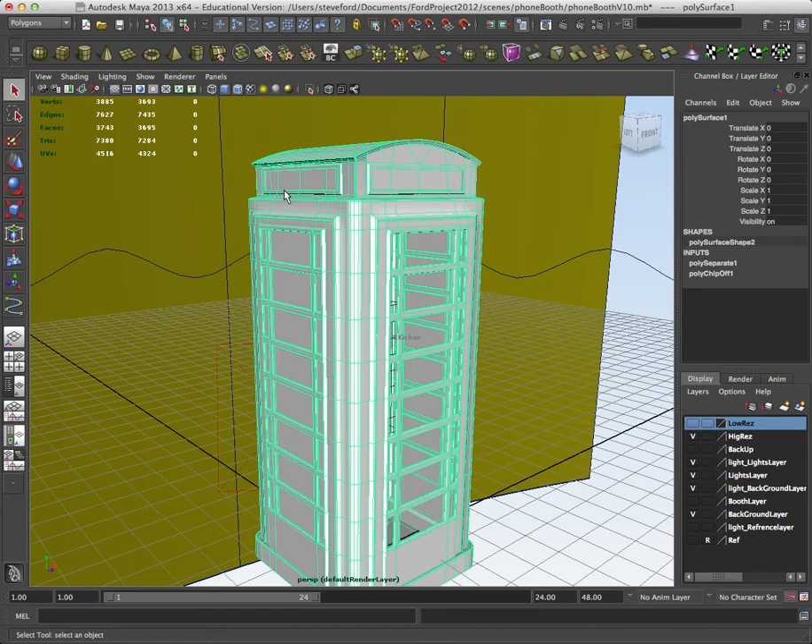Okay, so selection. Selection is very important to being able to model efficiently. There are many tools in Maya to help you with this.

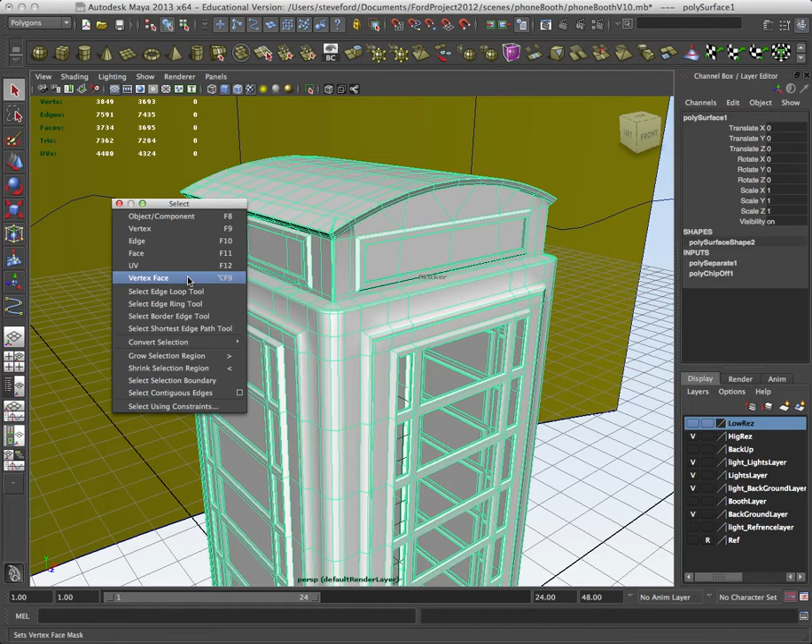I'm going into the poly menus here, and I'm just going to tear off the tab for select here. So you have your select object component, F8. You have select via type: vertex, edge, face, UVs, and face vertex, never have found a use for it. You'll find all those with your right mouse button as you go over things.

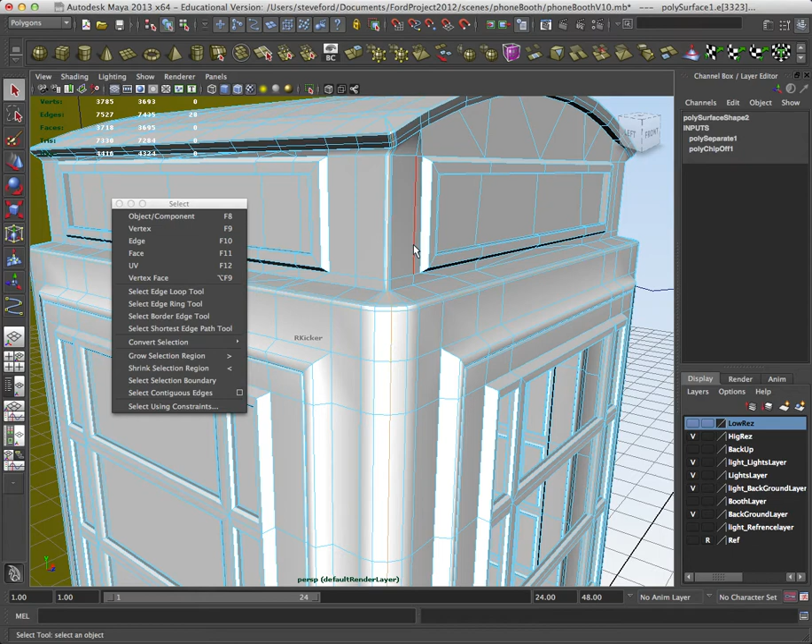One of the handiest things I have found in the latest versions of Maya is if I select via edge and I double click, it goes all the way around the object. That's select contiguous edges, which is this guy. I used to have to make a shelf button for it, but now it's just a double click and it will run pretty much the length until it can't figure out where to go.

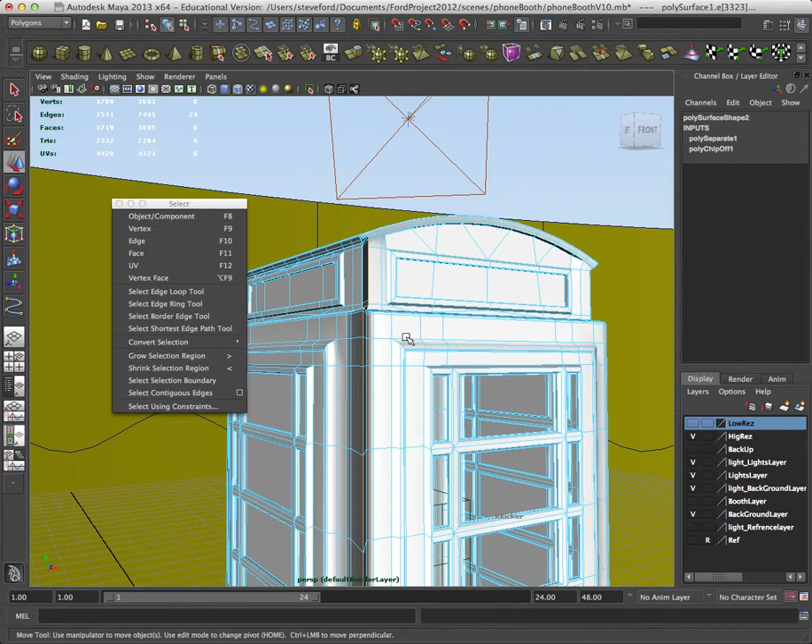Maybe I'd find that useful and I'd just go and deselect these guys because I've gotten most of what I wanted selected there. A lot of the thing in selecting is maybe selecting more than you need quickly and then deselecting a few things is the faster way of working.

Now if I double click on, let's say, this guy, so I've gone all the way around, I'm going to hold down shift and double click, and now I have two rings going around this guy, and I will do the grow selection region. That's the greater than sign, and you have shrink with the less than sign.

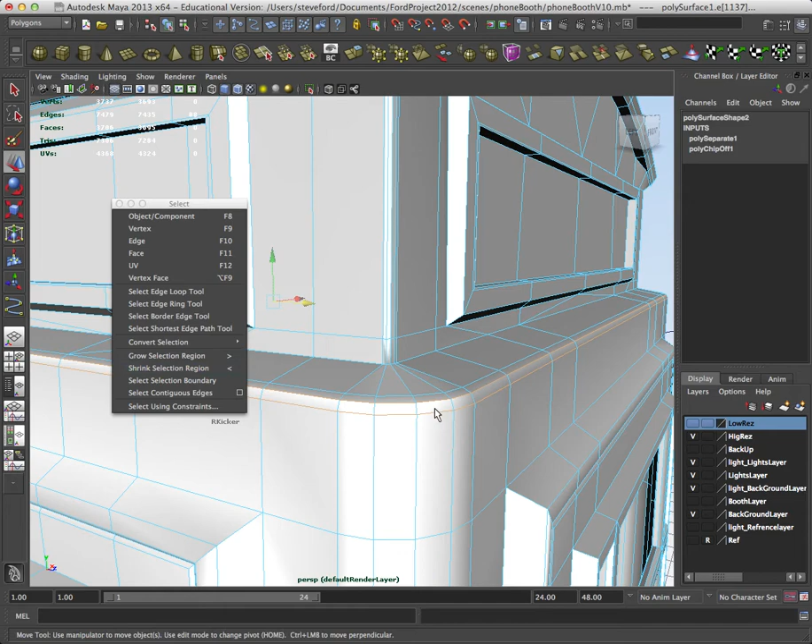So that's also another handy thing to know about, so maybe you can quickly select something that's much bigger than you need, and then hit that less than, once, twice, three times, and get the selection that you really want much quicker. Okay, so I'm just going to grow that.

What that's done is it's filled in these guys. And I can go to this select contained faces. So now it's selected all these contained faces because each one of those guys was surrounded. All right, and then I can start modeling.

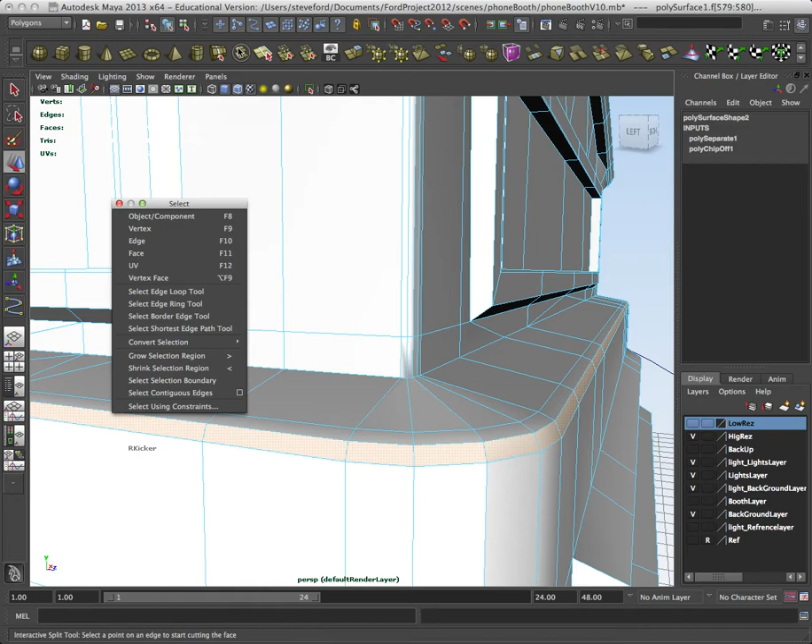I can use my extrude tool to extrude out that selection there, depending on what I'd want to use it for. Undoing that. So you really want to be familiar with these options here and then mix and match them in a series of steps to speed up your workflow to get things selected.

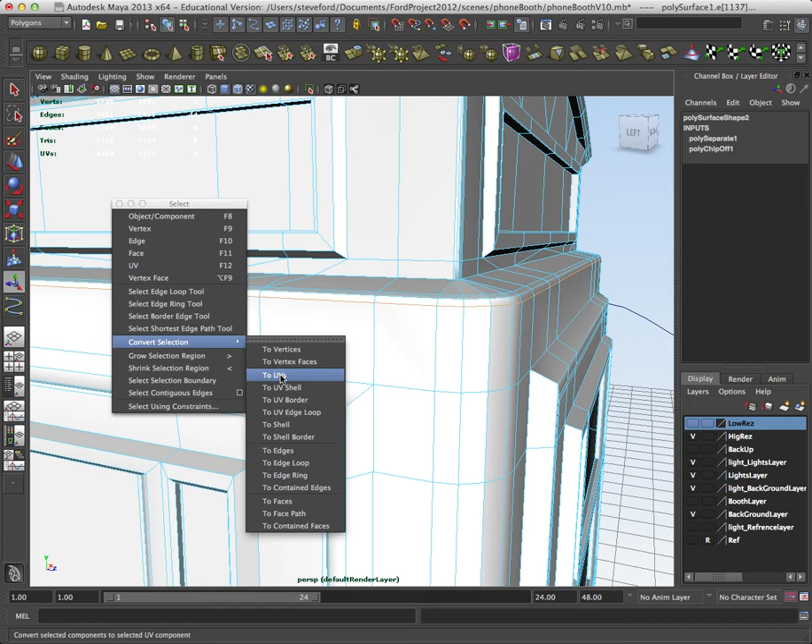So maybe it's very easy to select a ring, a set of edges, and then convert your selection to the UVs and get your UV selected that way.

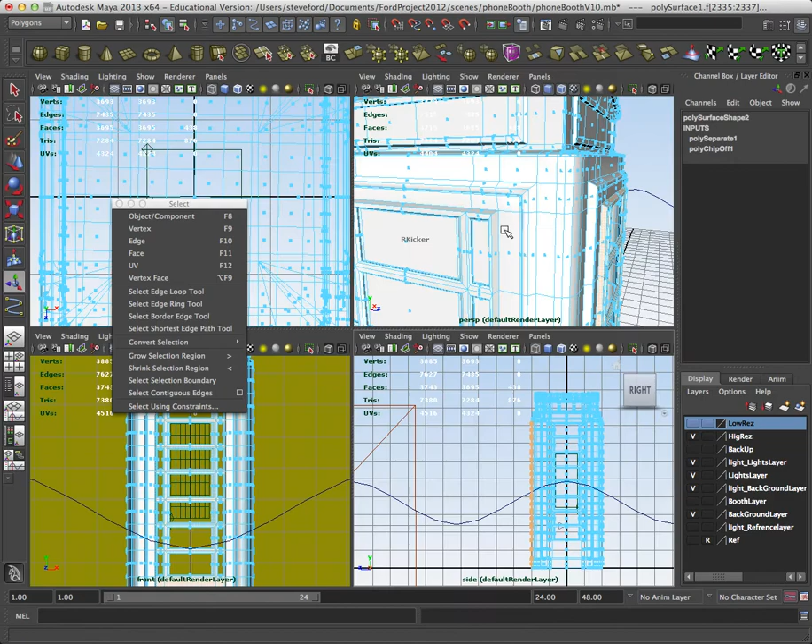Or pop to the side view quickly and from the side view select the faces like so. I'll pop over here to the front. Now I got that selection for the faces, and I grow twice, and now I have that region selected.

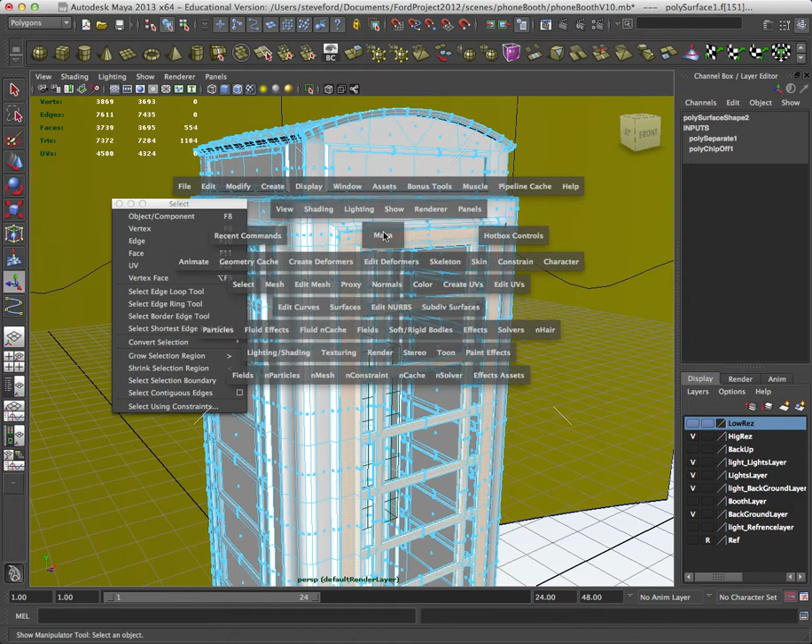Maybe I'd extract that. So I'll just go to mesh, extract, and now I've extracted that door. Okay, so there's lots of great features here.

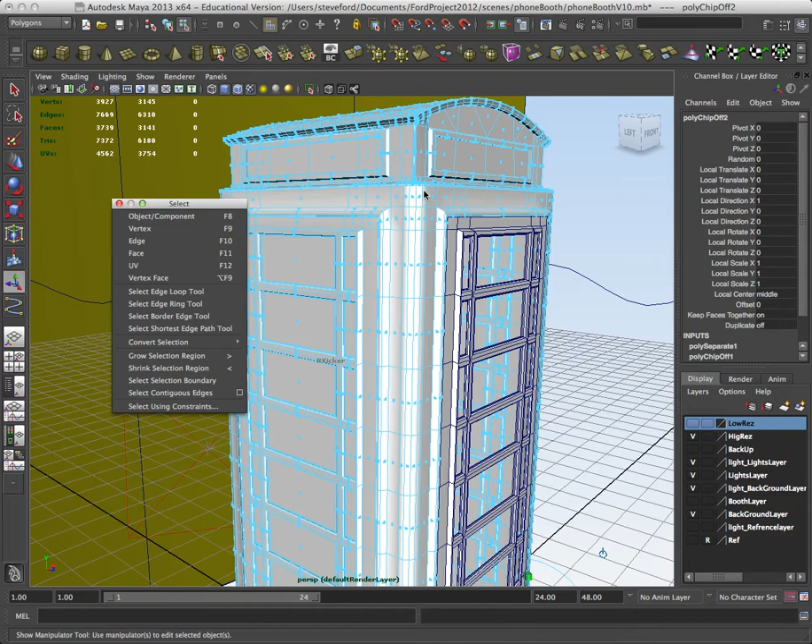Now let's see, if I select selection boundary, if I click on that... okay, so if I select these guys and do selection boundary, it's grabbed the outer guys there only. So the middle ones, it's deselected. I was thinking the other sort of boundary.

So let's see, convert selection to boundary edge. Maybe that was it. Anyhow, I don't use that one. I've shown you the ones I use frequently.

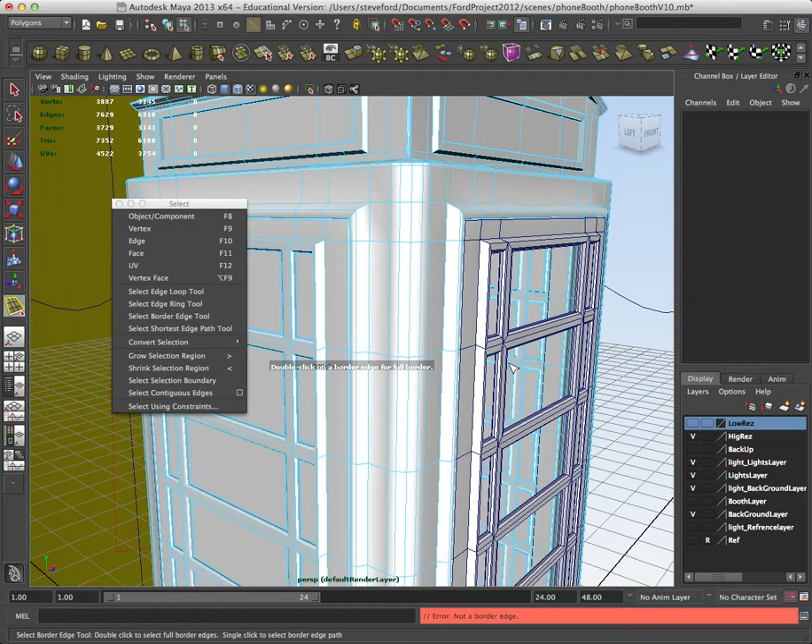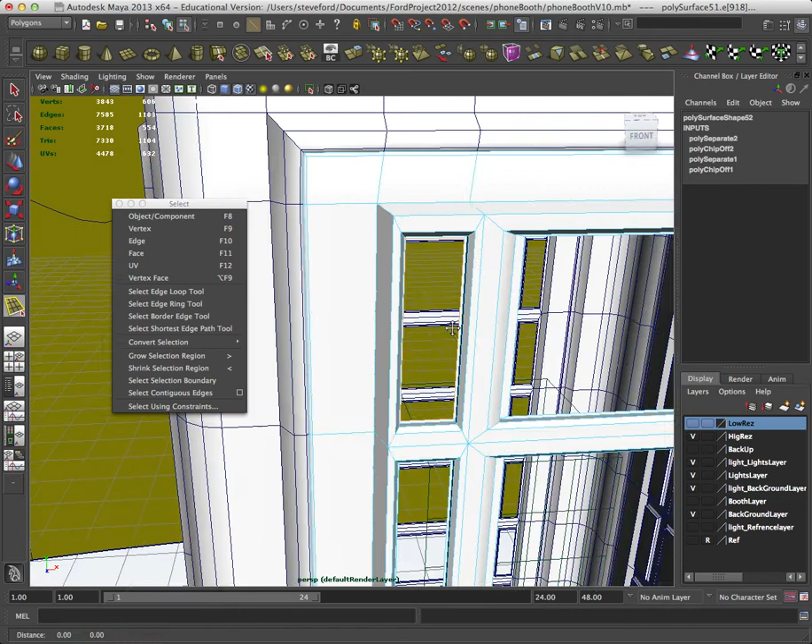So the edges of a piece of geometry, if I select the border edge, it will go around and now the entire little window there is selected by double clicking with the select border edge tool. Then I could do an extrude if I wanted, or build something on it.

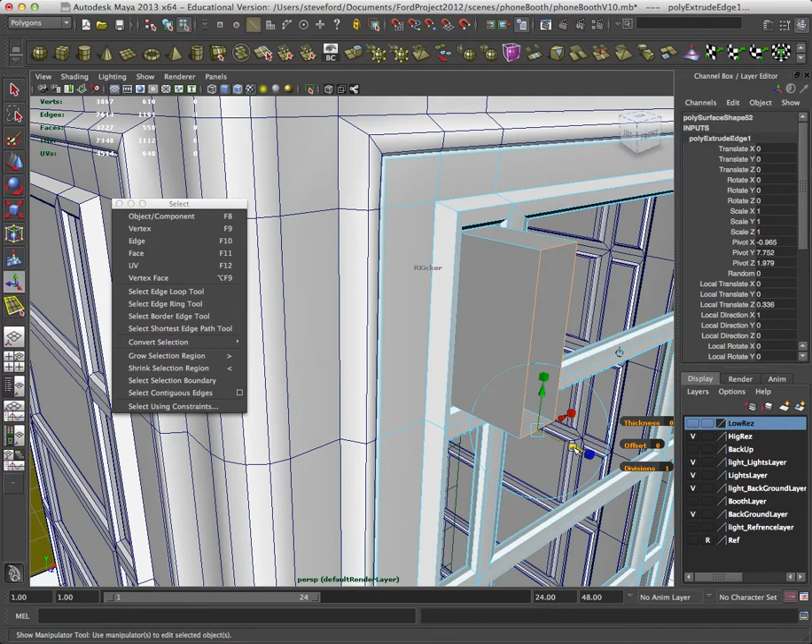The border edges are dark, so you can spot them that way, but it's really just the border seams. That can be handy when you're sewing half a character together - select that edge, flatten it out, make sure it's perfectly planar. Okay, so that's that.

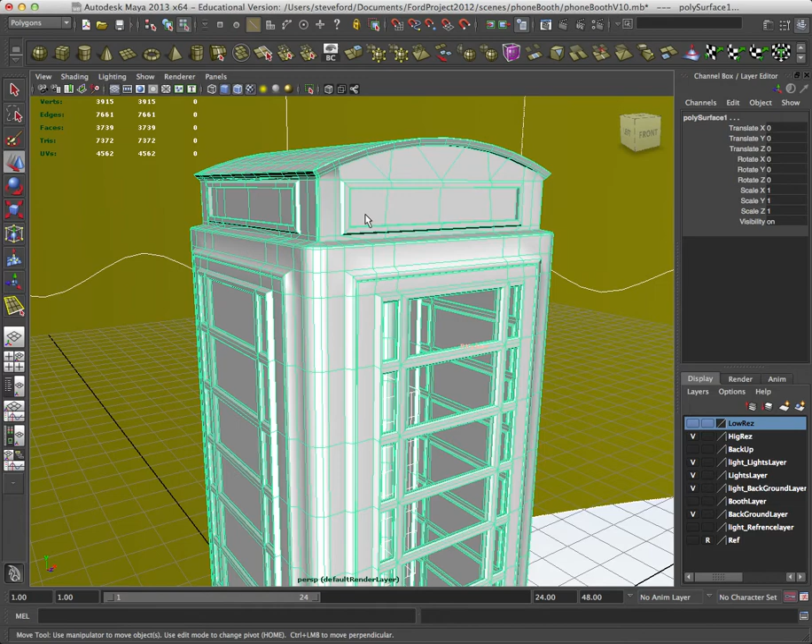Out in this interface, play around with it, get yourself familiar with it. The other thing I want to suggest, I've got a couple more suggestions on this topic for you. If my computer decides to behave, there we go.

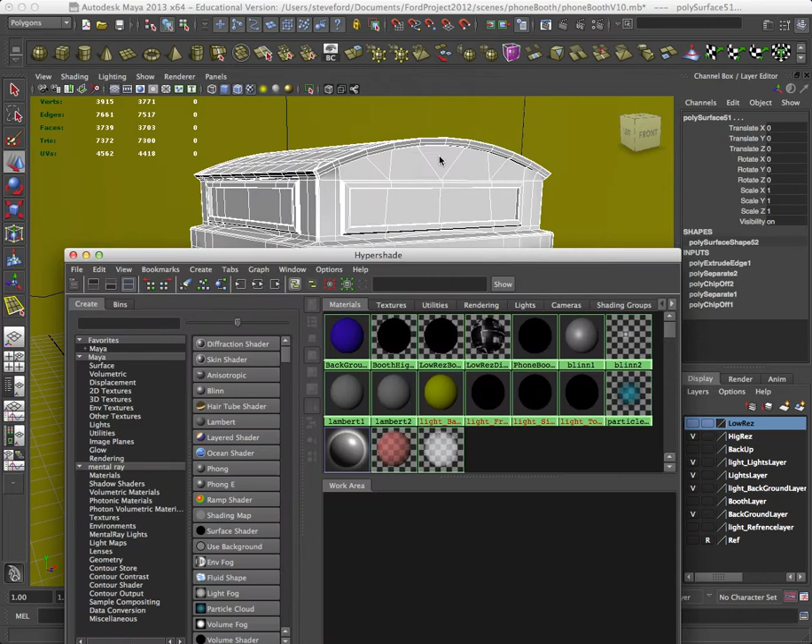Windows, rendering editors, Hypershade. One of the handy things is you can select, by going over the material here, I can do select objects with material, and here I have all of my pieces of glass that I split out. So that's another way you can get something selected.

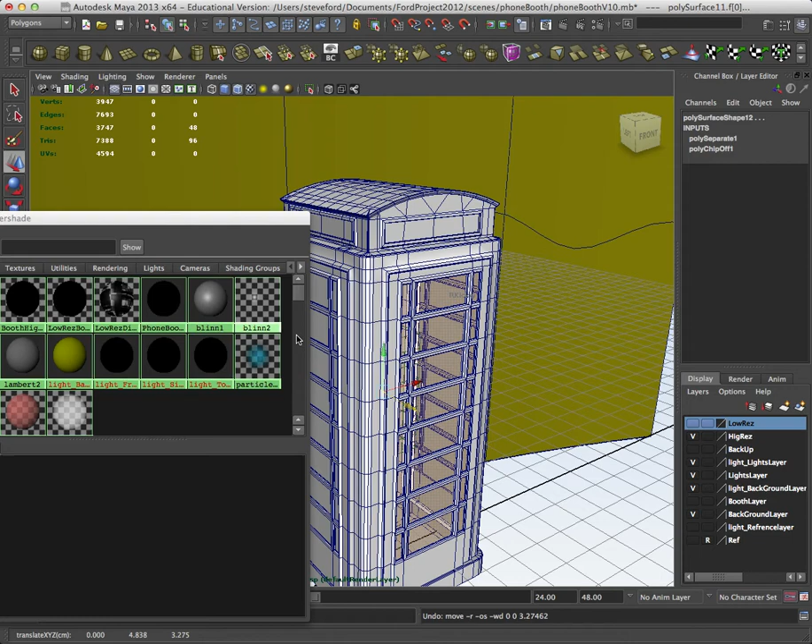So I could then convert that selection to faces. I could assign a different shader onto it - assign material to selection. Now I have this blue shader on all of those. I can put the clear back onto it if I want. Let's see.

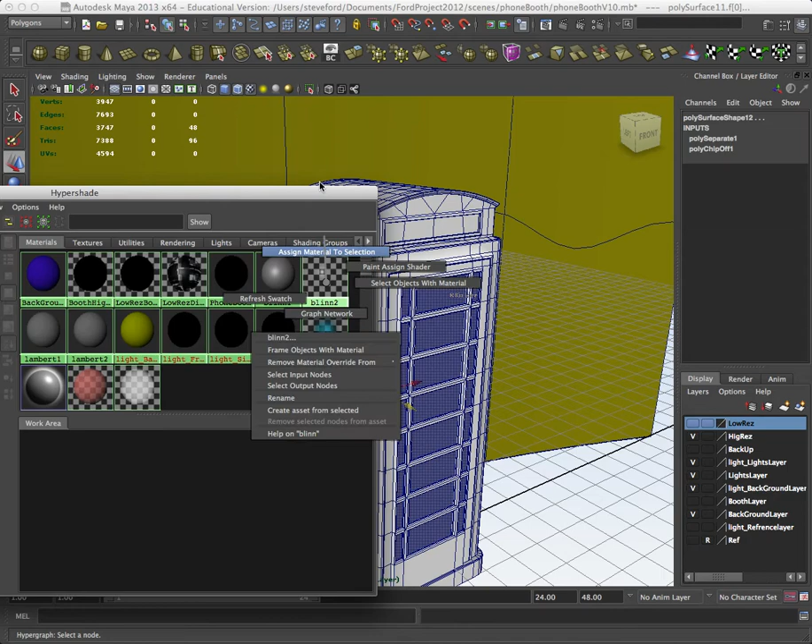There we go, so you can work incredibly fast. Other options that you have is you have a lasso tool like in Photoshop, and that's very powerful. I don't use this too much, but I could lasso and grab some things.

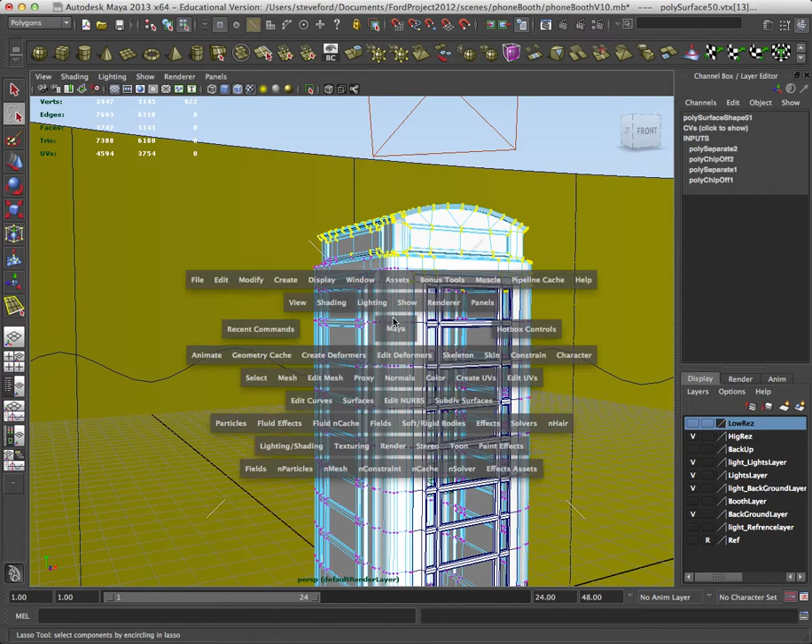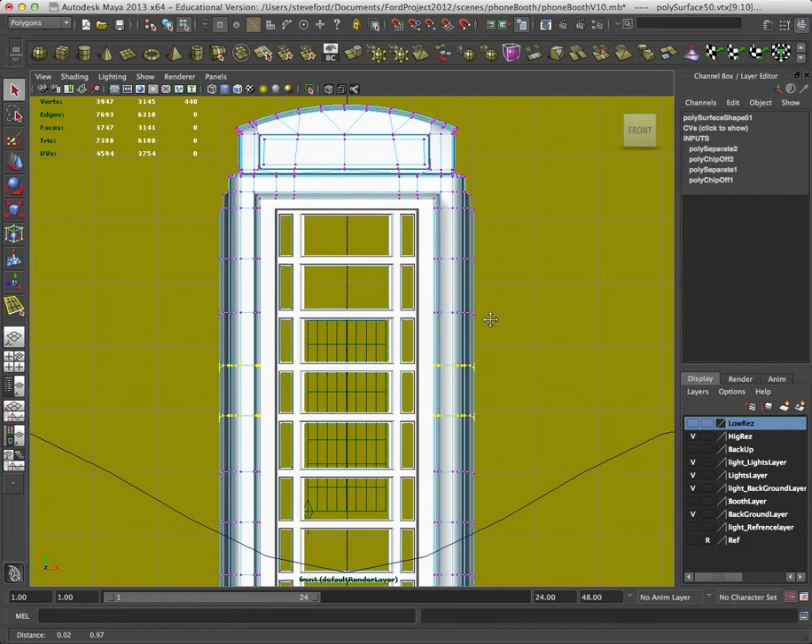It's probably more helpful over here, I could go like that. So I find working the orthographics when I'm doing selection is very handy, just because I can get a really good, accurate selection around an object this way, or cut off the back of an object.

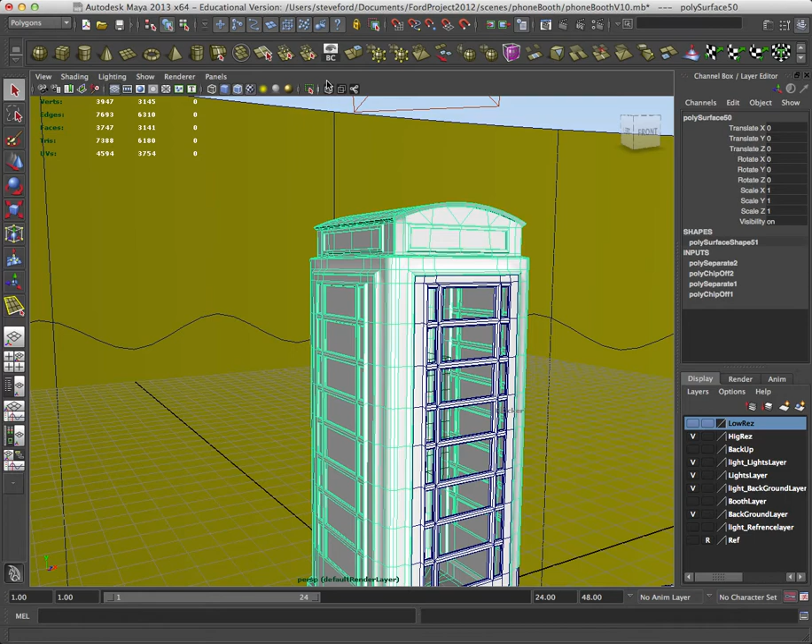Now another thing to be aware of, heading back - having backface culling turned on. I have a shelf button for this, let me show you where it lives, because you won't have that button. If I go to display, polygons, right at the top I have backface culling, and it turns off the back sides of things.

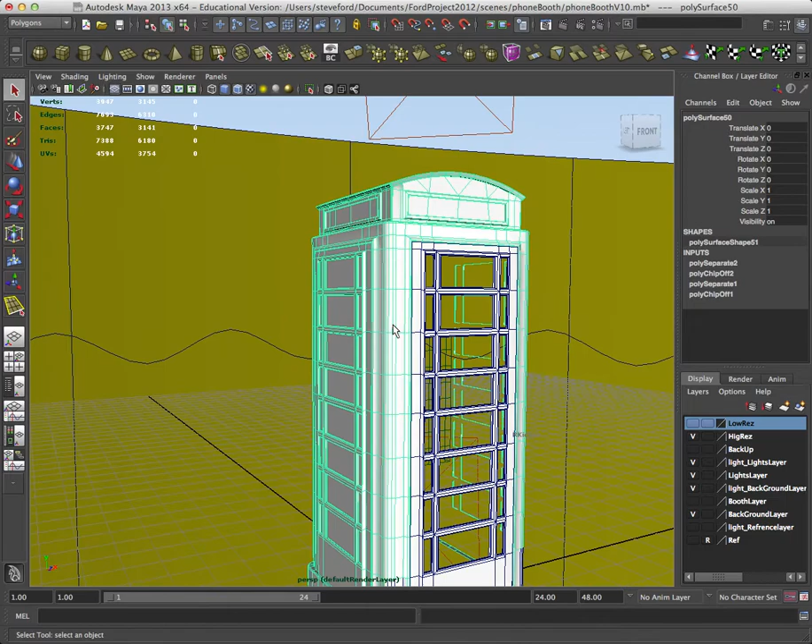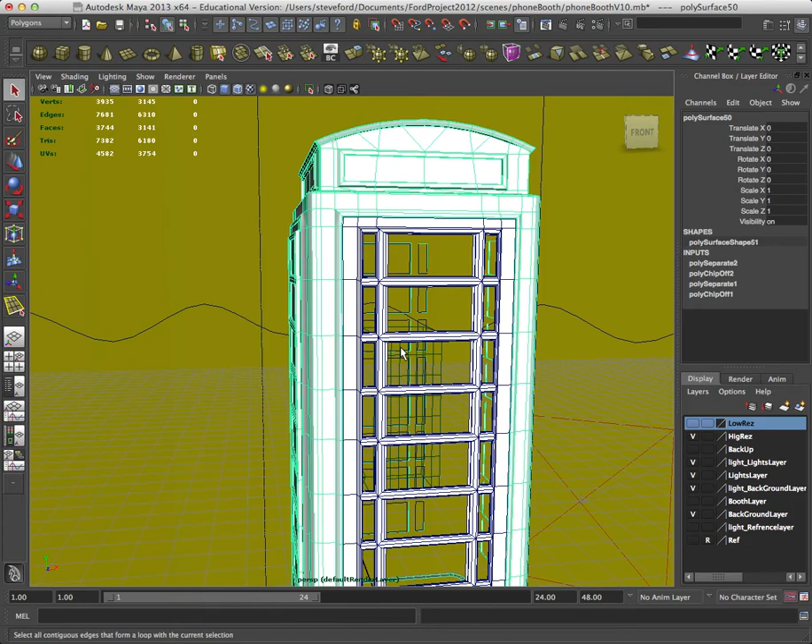Now on a shape like this, I'm still going to have to worry that I'm going to get a few guys turned on, selected on the back side. But for a lot of things, that can make it a very fast way of working, where you're not getting stuff on the backside so much. Let's turn that back on. I've made a shelf button for that because I use that frequently.

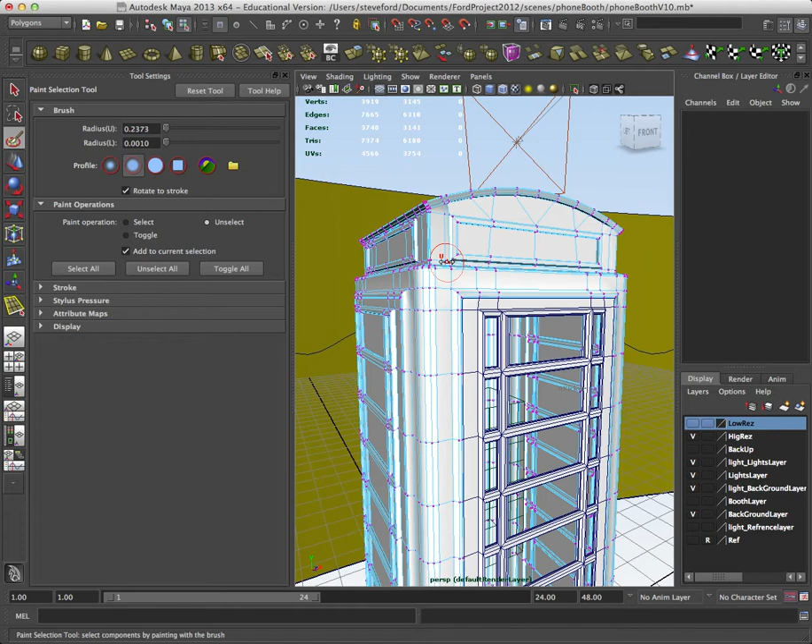And of course you have your paint selection tool. So I'm set to vertices, and I can hold down B on the keyboard to change the size of my brush, and I can just go through and make my selections via painting. So maybe that works for you.

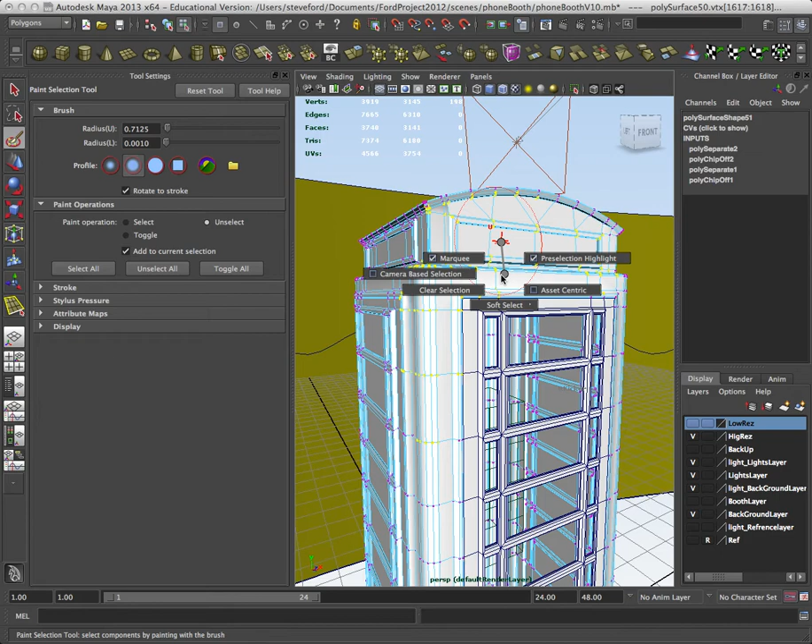And you can hold down U on the keyboard to change between unselect and toggle, select, and camera-based selection, asset-centric, soft select. So there's lots of other little things in there for you to play with.

So you're going to find the things that you like the best to work, what makes sense to you. And some things you'll do for like a year or two and then shift. But those are some of the basic selection tools, and really you'll be a lot happier with Maya.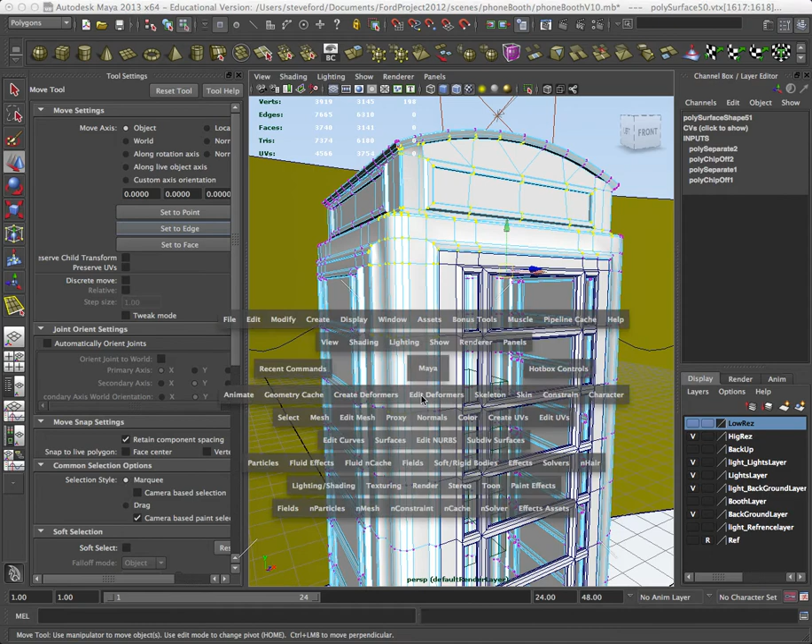With every task that you do, you ask, can I do this a little bit more efficiently? How can I get my best selection? Is it going to be faster if I do it in an orthographic view? Is it going to be faster if I do a big selection and then deselect? What do I need selected? Can I select it as faces quicker than as verts? So, hope that helps. Have fun.